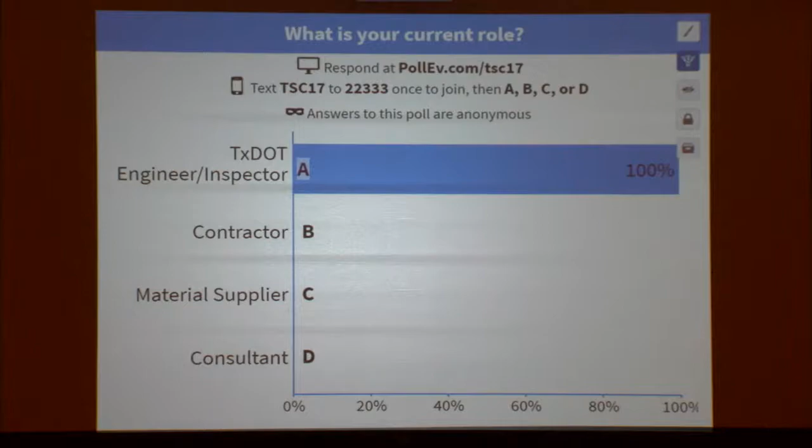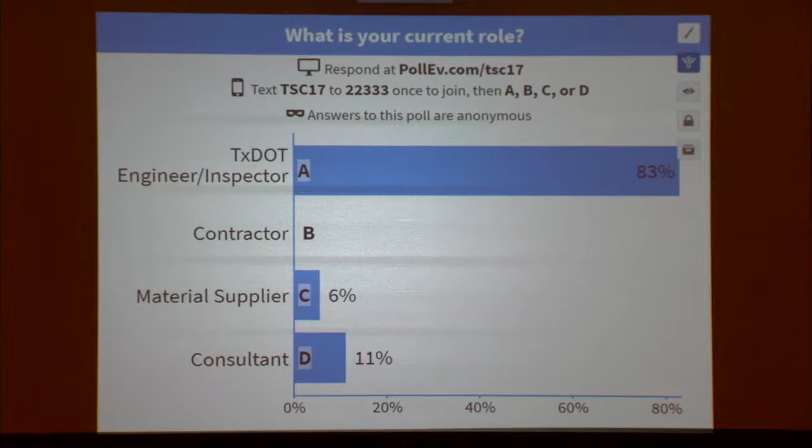All right, so first poll question, what is your current role? I think we had a similar question, so we could probably see that most of us are going to be TxDOT. I guess all the industry left. There we go, a few material suppliers, consultants. So just to give me a sense of what the room is here.

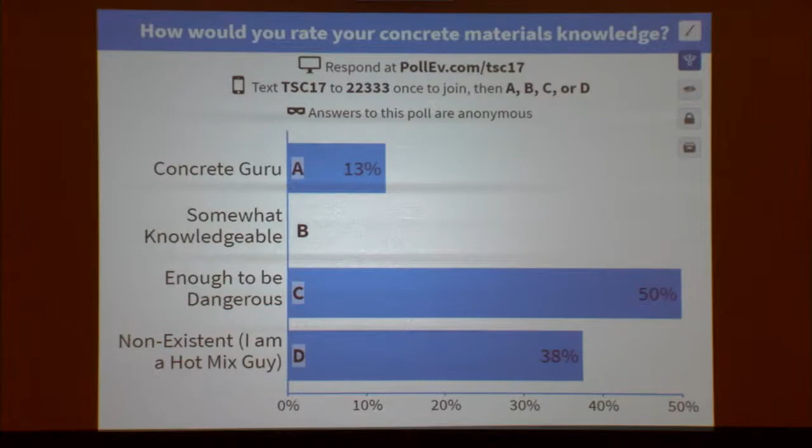All right, next question. How would you rate your concrete materials knowledge? Do you consider yourself a guru, somewhat, enough to be dangerous, or non-existent because you're a hot mix guy? All right, I get to teach some hot mix guys some things. All right, you concrete gurus, you're going to want to answer all the questions - so if you answer you're a guru, be warned.

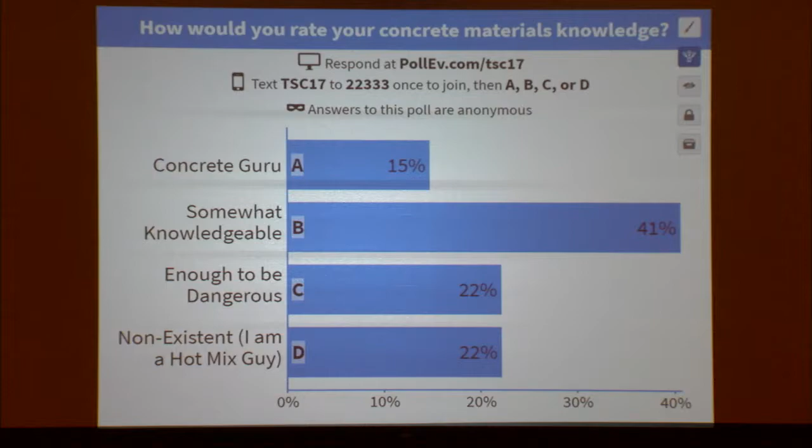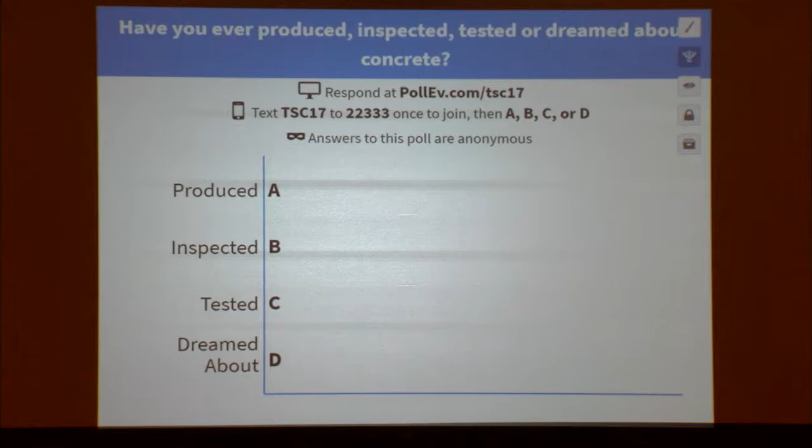All right, next one. Have you ever produced, inspected, tested, or even dreamed about concrete? Hey, I was afraid I was the only one. Man, I'm glad. All right, there's a bunch of sick minds in this room, I guess - 20% of us dream about concrete. Awesome, all right.

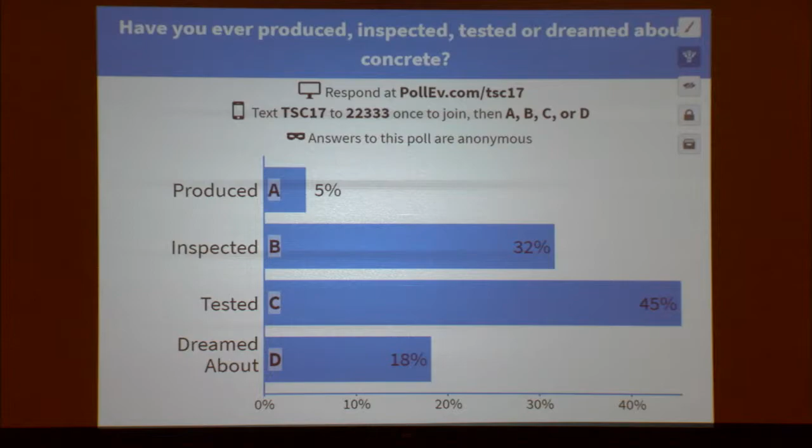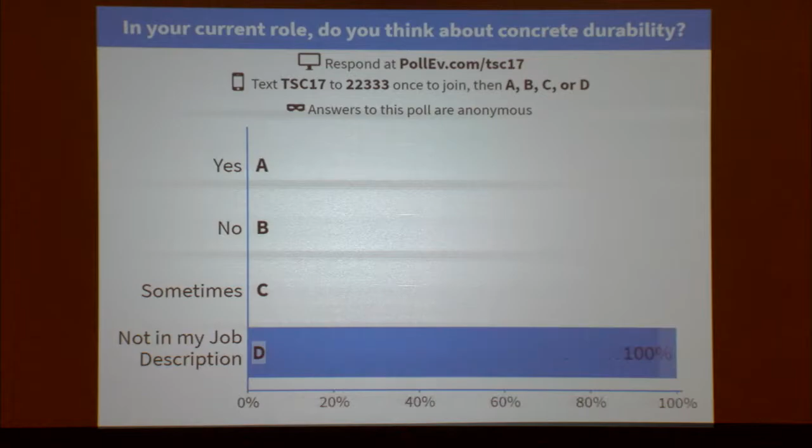In your current role, do you think about concrete durability? Well, that's good, a pretty good percent of us think about durability during our jobs. I would not have expected that, so I'm actually glad to see that percentage is pretty high.

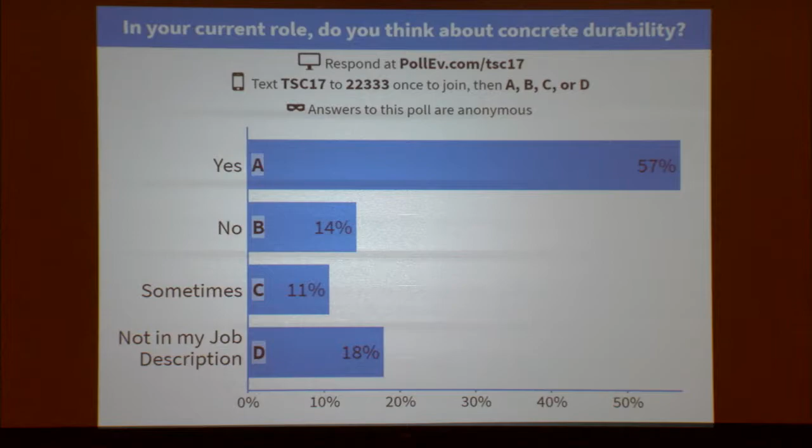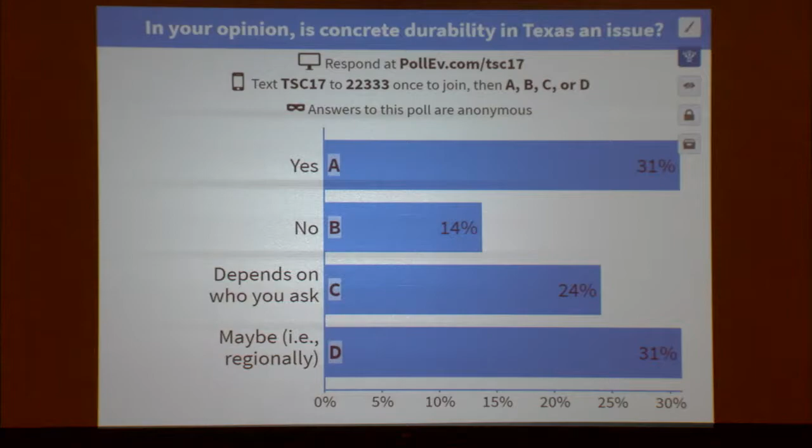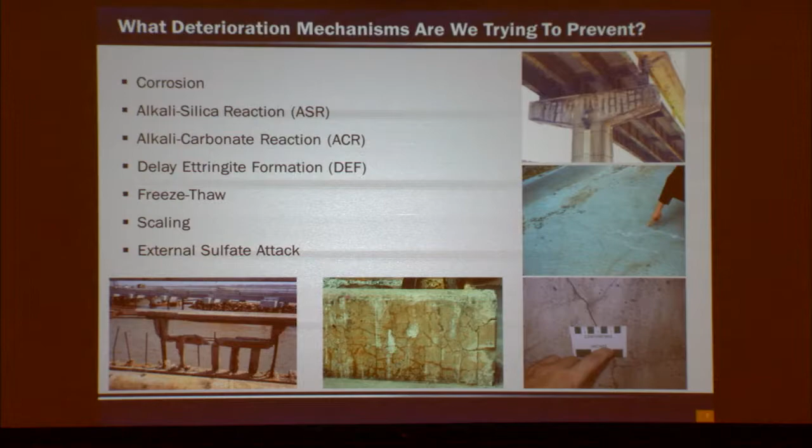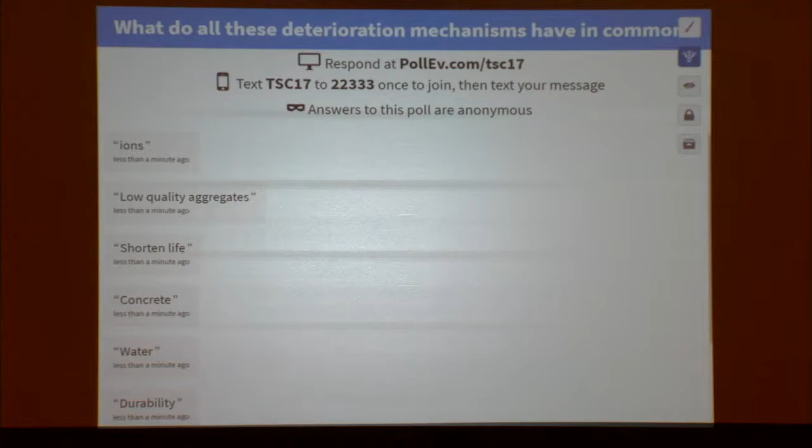So next question is, what do all these deterioration mechanisms have in common? Take a best guess - what is the one thing they have in common? Don't be shy, you're not getting graded. Failure, okay - guess that's the topic of the presentation, huh? All right, those all have their common things. Well, who said water? Raise your hand, who said water? We're back there - that is actually the right answer.

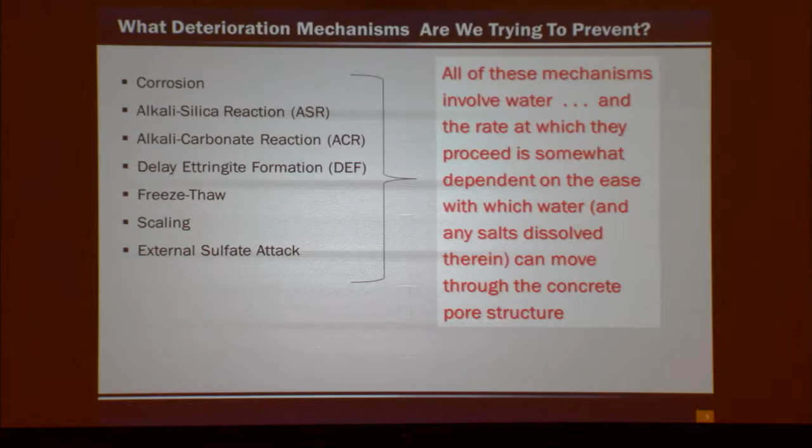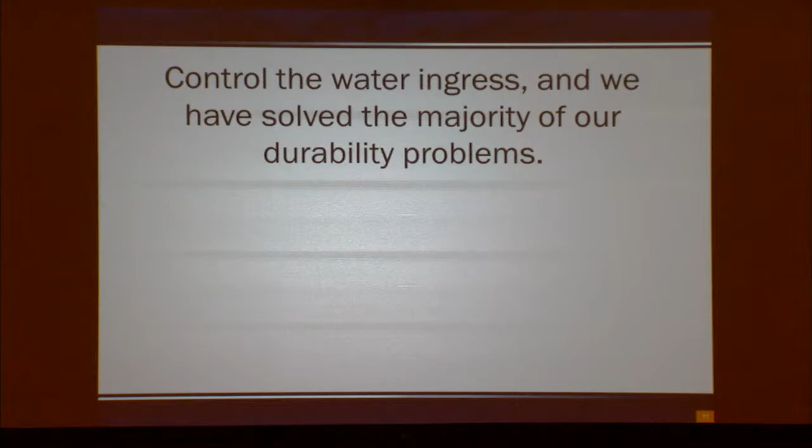Water is the one thing that all these have in common. We're trying to control water, and if you stop that, you probably get rid of most of these deterioration mechanisms. So I'll let you in on a little secret, okay? We control water ingress, we control these durability mechanisms. All right, so easier said than done, especially in transportation structures. Most of them are in water, some are in water, it rains, right? So it's kind of hard to do. So how do we do that? Well, we have to look at, with most things, the entire approach.

We have to look at the environment where our structure is going, any design aspects we have to consider. Do designers even consider durability as they're going through this process? Then we get into materials, proportioning, curing, all with the goal of minimizing cracking. You stop cracking, you're already ahead of the game. But if we have decks that crack, we're setting ourselves up for failure.

This is a topic I could talk about all day, probably three days, a month, so I don't have enough time. I'm only going to focus on a few of these yellow boxes here to give you an idea of what we do as far as durability.

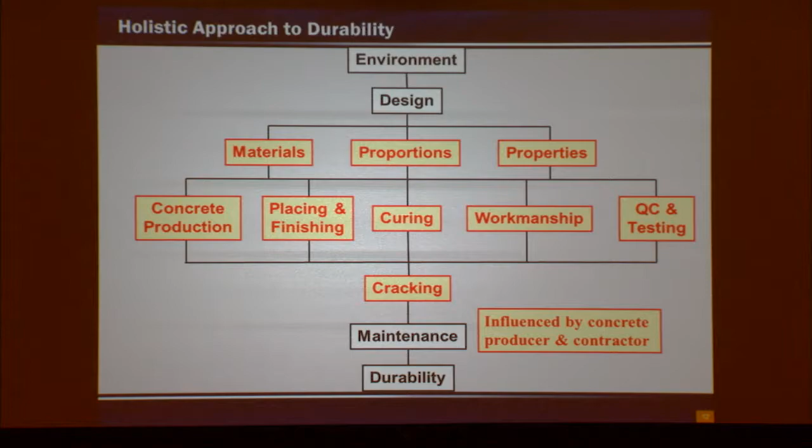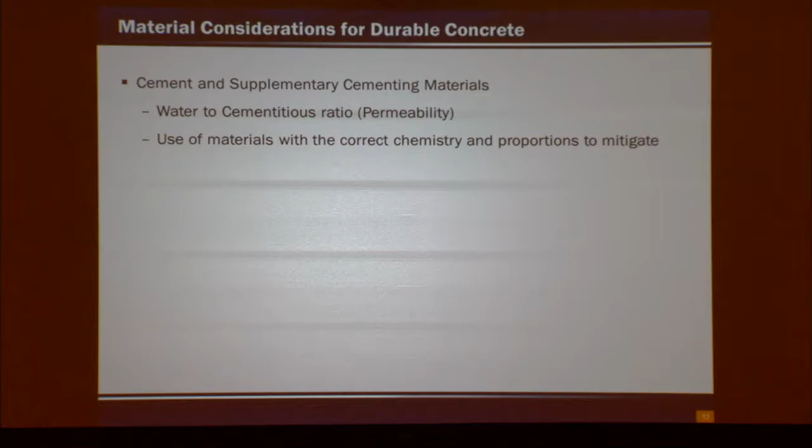So a few material considerations for durable concrete. The first issue we'll talk about is cement and SCMs. Everyone knows what water-cement ratio is, right? It's our weight of water per our weight of cement, that's our main parameter, and it tells us some degree of strength and durability. That's one topic I'll discuss, and then other things like chemistry of materials and proportioning.

You are warned, there is going to be some chemistry involved in this presentation, and you will be required to remember at least one of them. You will be tested at the end, so keep that in mind.

So water-cement ratio, and in the terms of this presentation, I'm talking about permeability. We've got a few concrete guys in here — who has ever measured permeability, and I'm not talking the rapid methods? Who has ever done that? I just said the most important thing is keeping water out, and no one here has ever measured permeability.

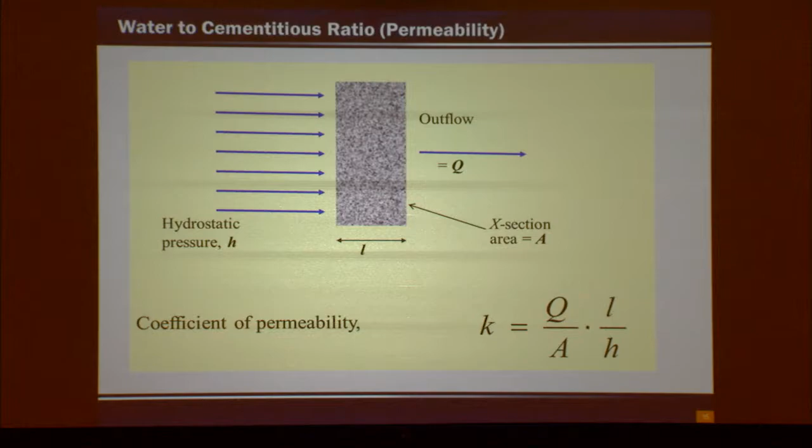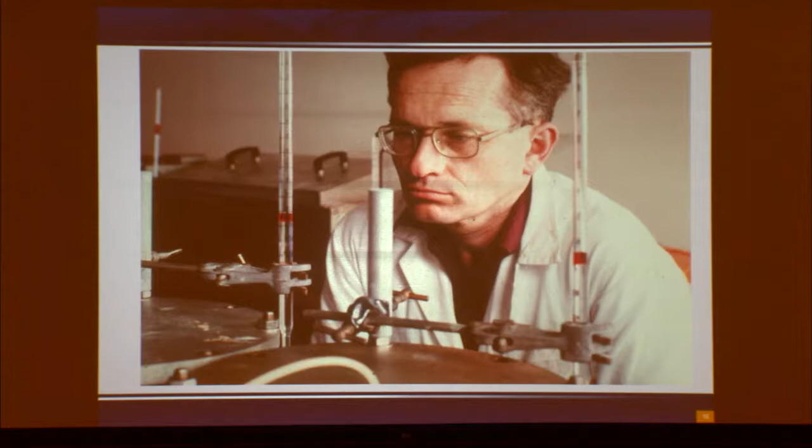So why? This is what permeability is — the flow of water through concrete, and we're trying to minimize that. So why don't we do that? We don't want to end up like this guy, right? This probably has to be the most boring job ever, watching that little tube and how much water is flowing into that concrete. But it's a very important parameter of concrete, and if we stop the water ingress, we will stop most of our deterioration mechanisms. But I can't imagine doing that all day.

In terms of permeability, what we're looking at — this is a high water-cement ratio concrete, a little depiction here. Cement particles in some water: the higher the water-cement ratio, the further the particles are from each other, basically diluting the system. But we're also creating these larger pores that are connected to each other now, and that's the path for water to come in when it dries.

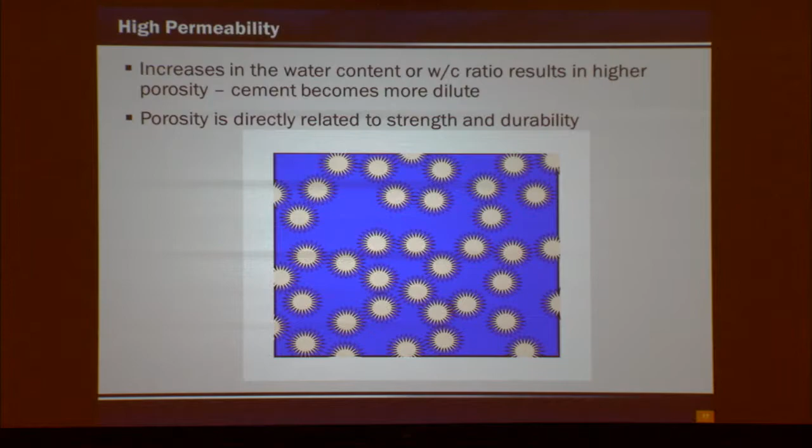When we talk about lower water-cement ratio mixes, our cement particles are closer together, we have less connectivity of the pores, and therefore the ability for water or other ions to get in is reduced. That's the goal in terms of trying to set a lower water-cement ratio — it's really for a permeability issue.

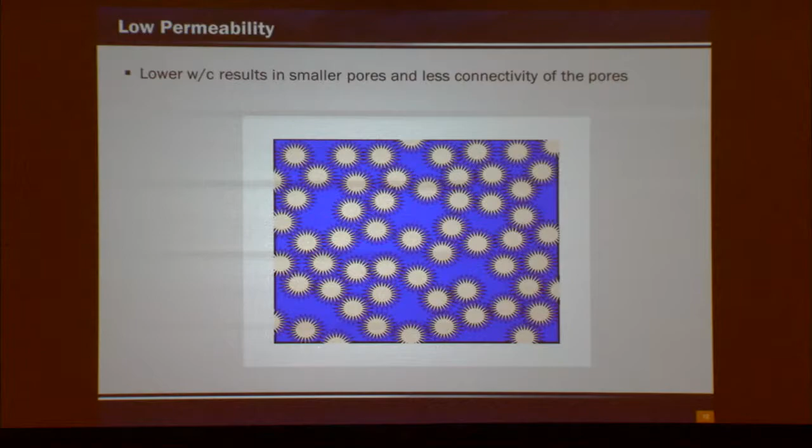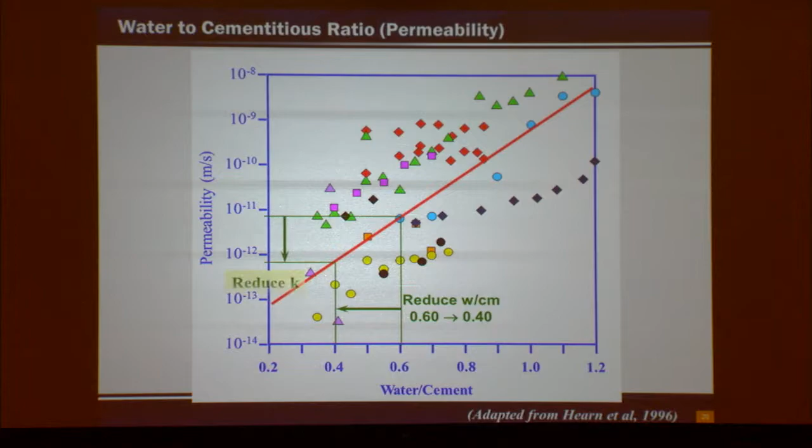Here's some data showing water-cement ratio versus permeability. Again, there is some large spread, meaning there are other factors that control permeability. However, water-cement ratio is a fairly large lever arm in terms of permeability — we could get some substantial reductions in permeability if we reduce the water-cement ratio slightly.

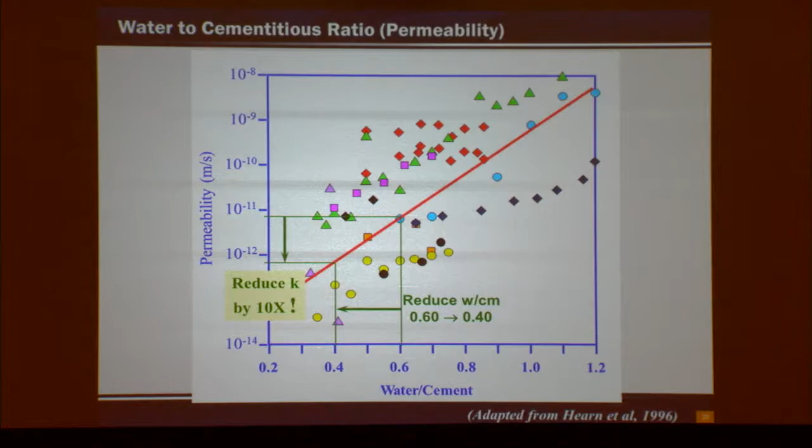What's our specification for max water-cement ratio for most concrete? We're at about a 0.45 limit, so we're somewhere around here. We've lowered that limit over the years to try to get less permeable concrete out there in our structures. We also get a strength increase with the lower water-cement ratio as well — that necessarily isn't always a good thing, but it does come along for the ride.

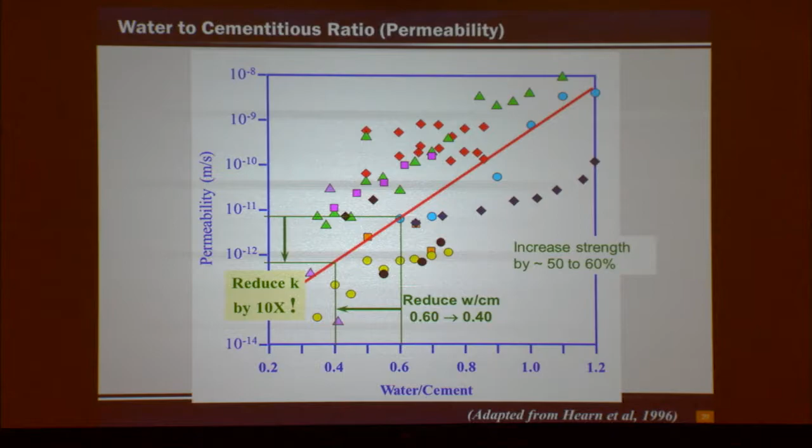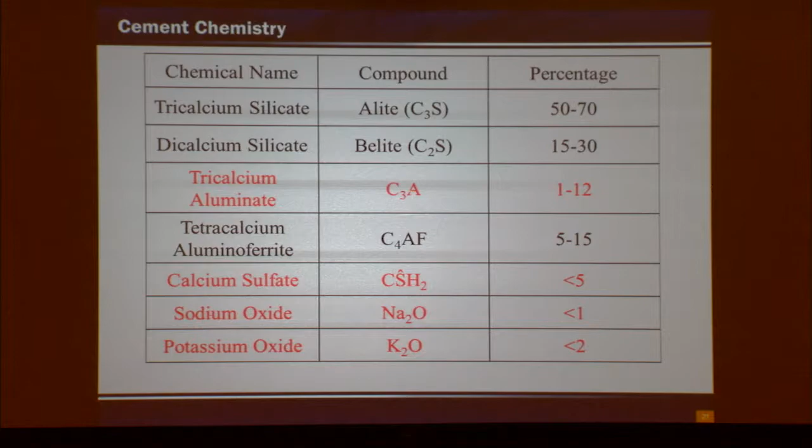So as with everything, we need to have a goal though, right? Our goal for concrete hydration is to produce as much CSH as we can, reduce calcium hydroxide, and reduce porosity.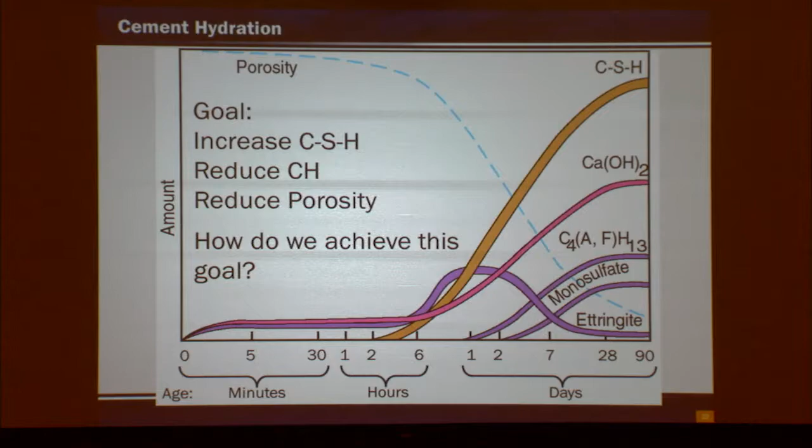So how do we do this? What do we do to achieve this goal? So here's your next question. Any guesses? What one thing can we do to solve or get all three of those goals achieved? This is a tough one too, so we'll see how good you guys are. There's at least one person in here that should answer it right. No pressure though. Beat the hell out of Florida, okay? Wasn't expecting that one. Wait.

All right, so how does fly ash do this? Well, let's look at the reaction, right? So when you mix cement and water, those are the strength guys, add some water, you get glue, and you also get calcium hydroxide. So what was their goal? Increase this guy, decrease that guy. So when I put fly ash in there, fly ash is basically this silica and aluminate content. They're going to grab this CH, use it in its reaction, and now I've made more glue, and I've reduced the CH. So I have achieved two of my goals already, right? By putting fly ash in there, I got two goals achieved. Now I got to work on the porosity. So where does the porosity thing come into play?

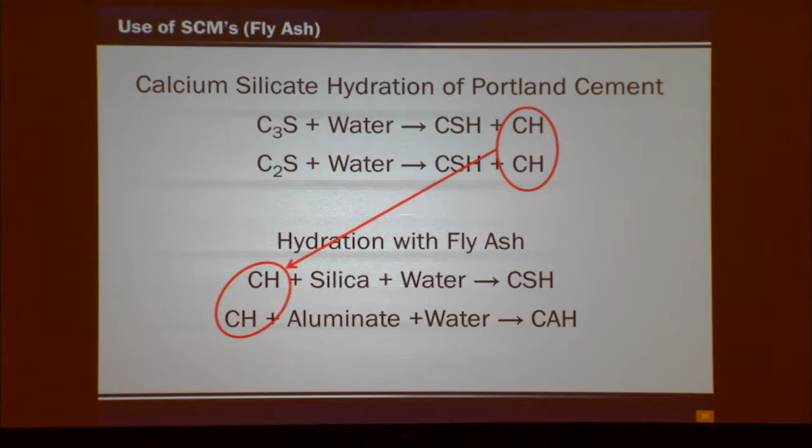All right, so let's look what happens when you use fly ash. Okay, so again, we use up that calcium hydroxide, and then we have this phenomenon of improving this transition zone, right? So if you look at an aggregate, that calcium hydroxide that is produced, it's plates. I don't know if you saw some of those presentations early on show those micrographs. So calcium hydroxide are these plates, these flat plates, and they line up along the aggregate. So this zone right here is very porous. So water comes in and it's going to find those zones and just trickle its way down through the concrete. So again, when we use fly ash, we use up this calcium hydroxide and we make more glue. So there we go, we have now improved the porosity of that region, and now that is more like the bulk paste out in the middle.

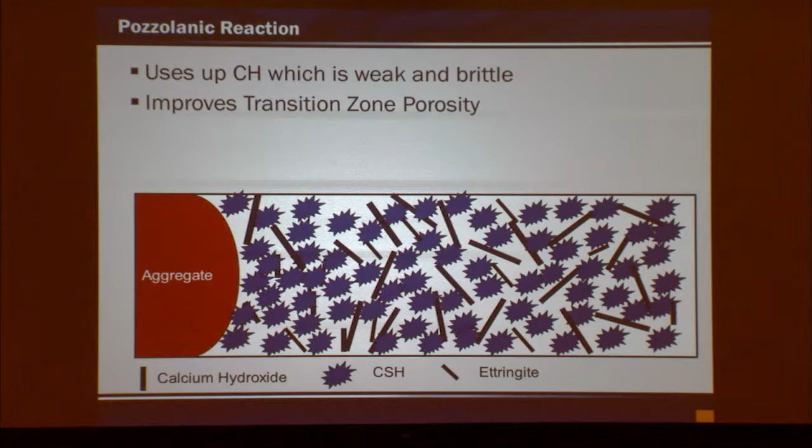So fly ash is very, very beneficial to concrete. Here's some data showing just that we have a substantial reduction in permeability over time when you have fly ash in the mix.

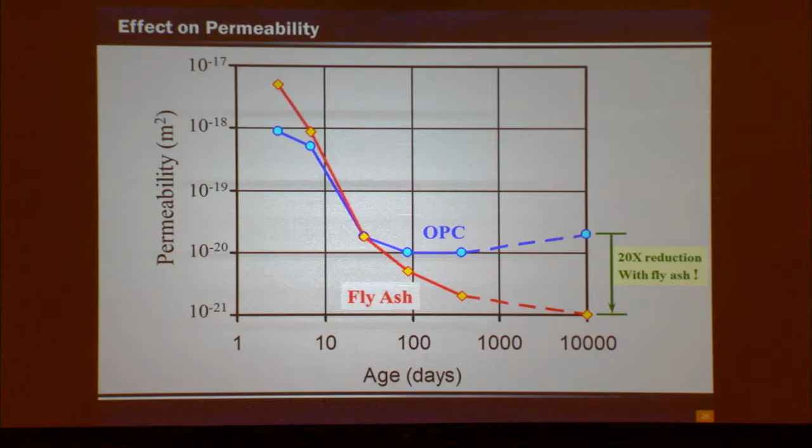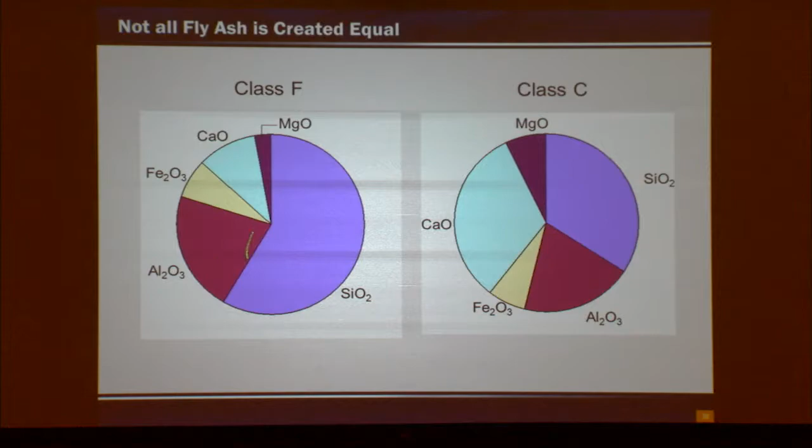All right, not all fly ash is created equal. This is Class F fly ash, it is basically a silica based material, right? That's what we want. Class C fly ash is kind of more of a calcium oxide with some silica. It also has the glass chemistry is also different between the two. This has more calcium aluminate glass, that C3A glass that I said was a bad player early on. This one doesn't, this is more of a silica aluminate glass, right? So this is good for most durability aspects. This maybe not so well.

Let's put 20% C ash. Man, that failed. More should be better, so here's 40%. That didn't get better, because the chemistry of the glass of the C ash is completely different than the chemistry of the glass of the F ash.

And if you read our specification, we say no C ash in sulfate environments. So why do we do that? This phenomenon right here, because the chemistry of the fly ash is not set up to control that durability mechanism.

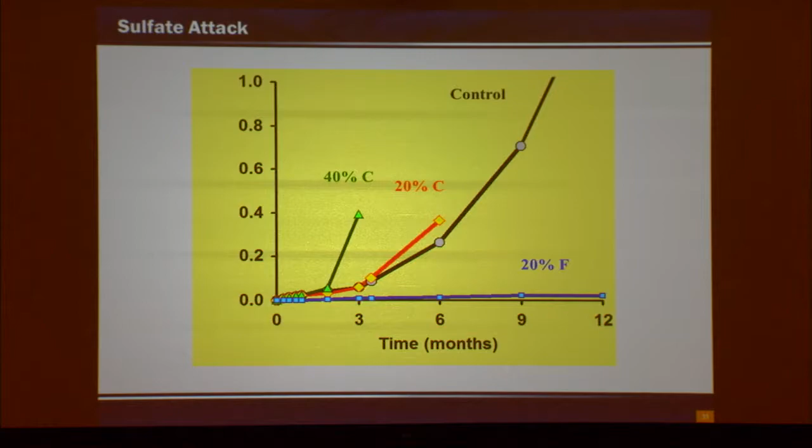Here's some research we did, actually some of my research from when I was in grad school. This was probably a month into the test, and it completely disintegrated. This had a high calcium C ash in the mix. The F ashes went 18 months. Here's some exposure blocks or prisms that were in a tank, and they completely disintegrated. So we have evidence that this is a true phenomenon, right? C ashes don't behave well in sulfate environments.

So just keep that in mind when producers come to you and say, 'Hey, I want to switch my F ash to my C ash.' Slow down there, right? We need to figure out what we're doing before we allow that requirement.

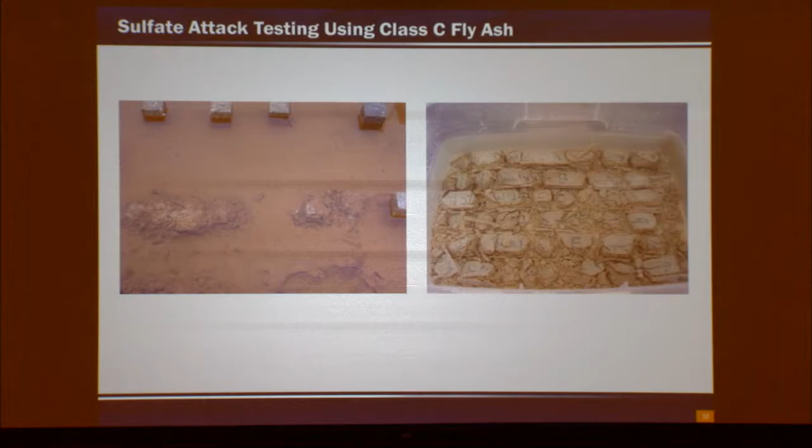I talked about the delayed ettringite formation earlier on. It's a lesser of the mechanisms that we have in Texas, but we still have it. It's a cement chemistry issue, but more of an early age temperature history issue. If we let things get hot too early, we don't allow the right products to form, and we'll have issues down the road. Basically, if we get this concrete temperature up above 160 degrees, our sulfates and our aluminates get trapped in the hydration products, and they're not available to do what they normally do.

Okay, no big deal, it didn't happen the way we wanted it to happen. Is that a problem? Well, in 10 years, it may be. Because as water comes into our concrete, because it's high permeability or whatever, these sulfates and aluminates get back into solution. They go into the pore solution, but they don't like being alone, so they have to find each other, and they make ettringite. Ettringite is a crystal that loves to grow big, and as this crystal grows and grows and grows, it exerts pressure. Concrete's not good in tension, and therefore we get cracking and substantial cracking.

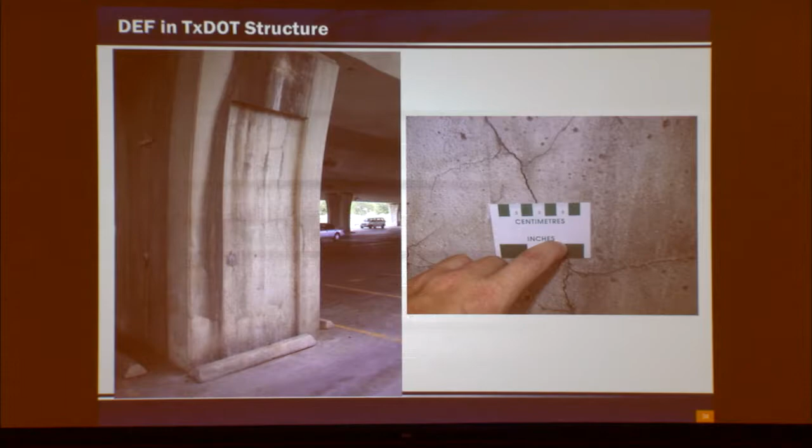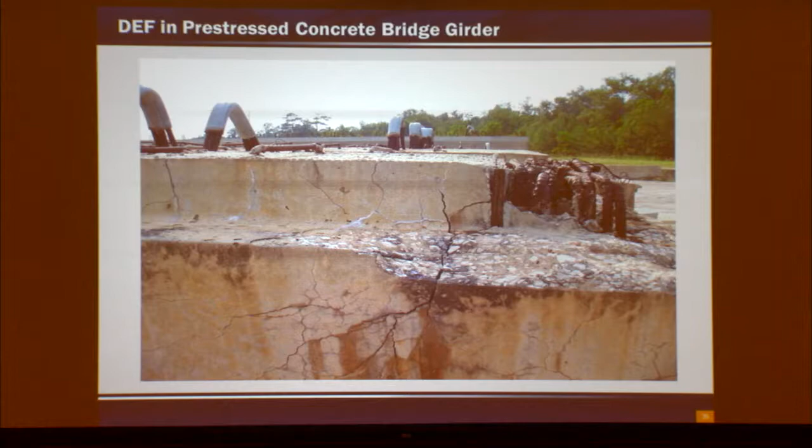Also in precast, it's been an issue because of high cement contents, trying to get early age strength. This is a girder that would have gone to Houston, and you see all the cracking that developed. That girder just sat there, it's never been in service. So we have had these issues in Texas.

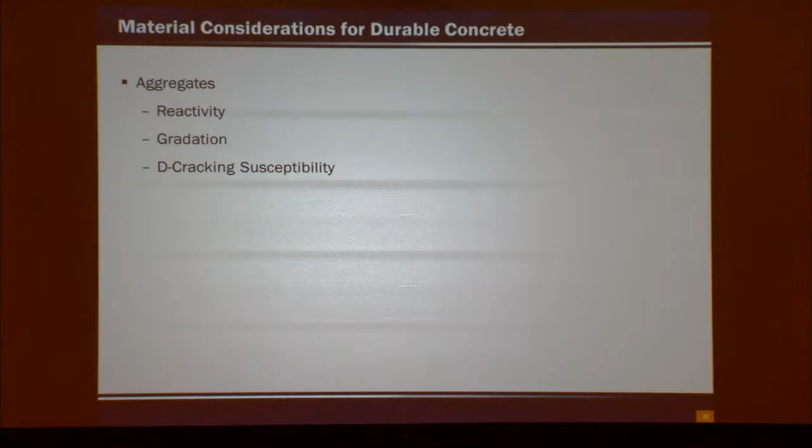All right, so let's switch our role to aggregates. Anyone's ever heard of D-cracking? We don't have any in Texas that I'm aware of, which is a good thing. Other DOTs fight this every day. So we're fortunate that we don't have D-cracking, so I'm not really going to cover D-cracking.

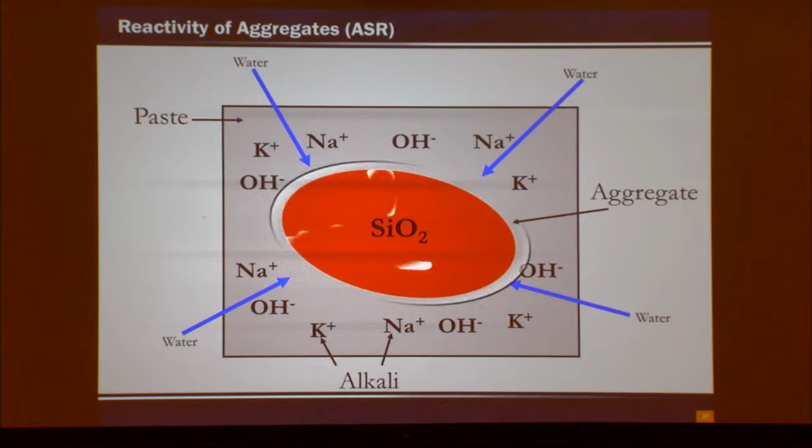All right, let's talk about ASR. As someone mentioned earlier, it's an alkali-silica reaction between the silica in the aggregate—that's an amorphous silica—and the alkali floating around in the paste. You have these hydroxyl ions that make everything high pH. Those will dissolve the silica in the aggregate, that silica comes out into solution, reacts with the sodium potassium, and when water enters the system, makes this alkali silica gel.

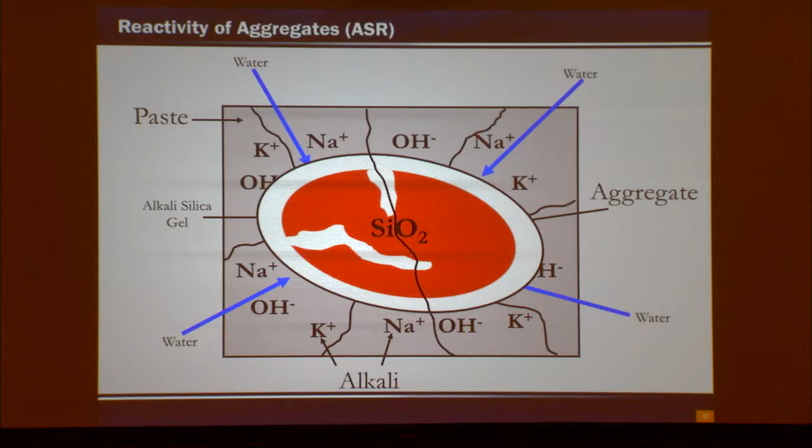Here's a prestressed girder. It's okay, no blackberries were harmed in the making of this photo. But if you're ever wondering what happened to all our blackberries, we fill cracks with them.

So that's what we do. They didn't go to waste. But this is a girder in central Texas, around Austin, that is still in service, that has a pretty substantial crack in it. A lot of research was done on ASR deterioration, and this girder, even this severely cracked, still has enough capacity to carry load. But now you start getting into corrosion issues, and how long is that going to last?

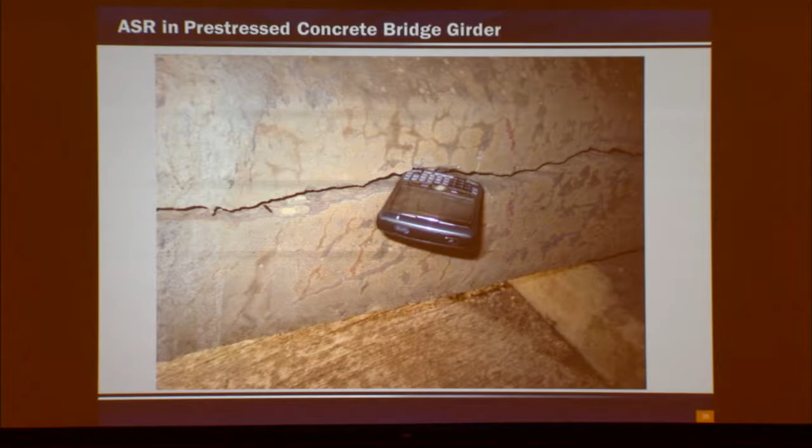And TxDOT made a very good decision back in late 90s, early 2000s to say all aggregates are reactive, so everyone's guilty of being reactive, and you cannot prove your innocence. So I call it Texas law. You're guilty and you can't prove your innocence.

Some of our specifications limit alkalis. That's a good one. But again, use of fly ash and other SCM combinations. And so if you look at our specification, we have 8 mix design options. All those mix design options are there to mitigate ASR. They're there for no other reason other than to mitigate ASR. So if you have a contractor saying, no, I don't want to use one of those options, you're running a risk that you're going to have ASR in your concrete down the road.

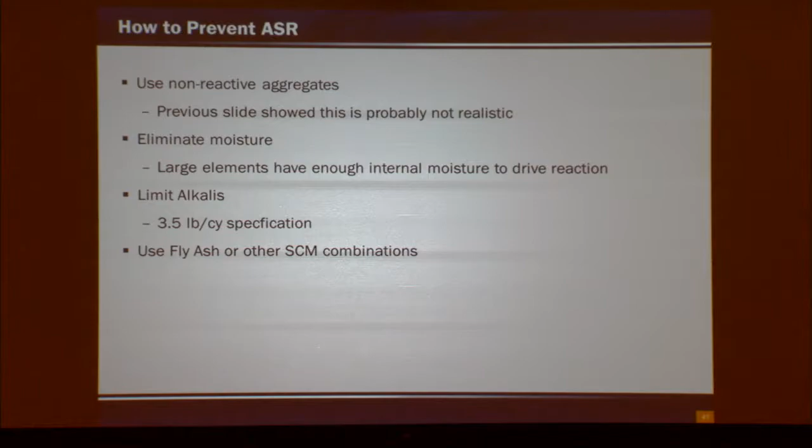So just keep that in mind when they come up to you and say, hey, I don't have fly ash, can I put 800 pounds of cement in there? Like, no, that's not what we want. You have to have the right amount of ash. Again, this is our F ashes, and hey, 20%, what's our minimum? 20%. So I mean, we just didn't pick that out of the air. We actually have some data showing that's where we need to be for ASR mitigation for most of our aggregates in Texas.

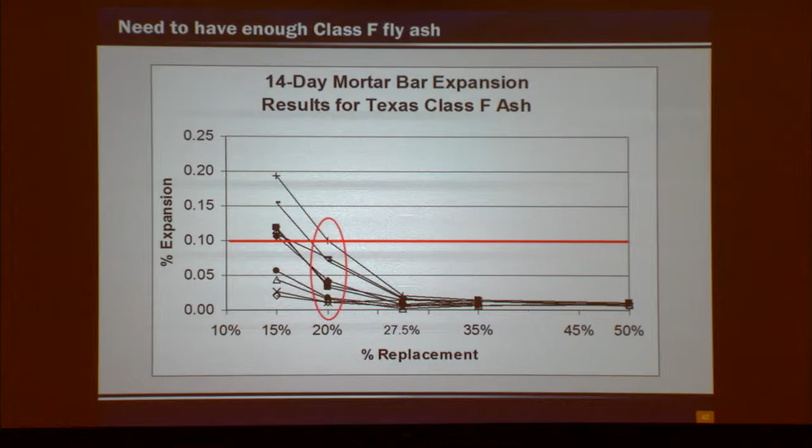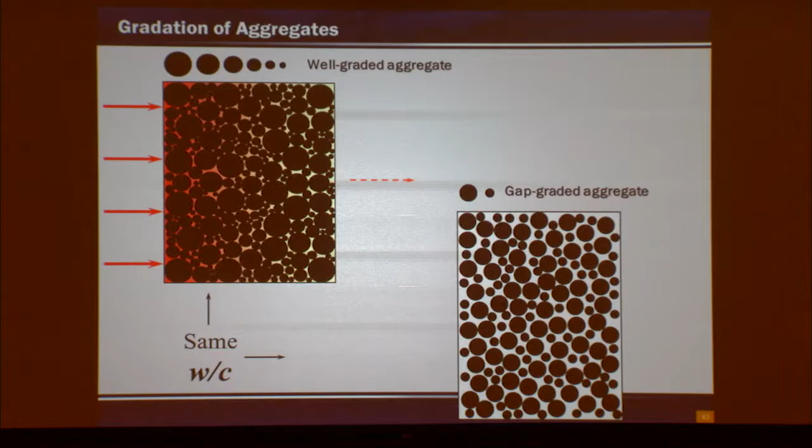Gradation is important. I am a well-graded guy. I love optimized graded aggregate. I think it does wonders for reduced paste content, reduces shrinkage, reduces cracking, so all that helps. Versus gap graded, have a lot more paste to fill those voids. Permeability gets reduced because of the lack of paste. So, I mean, there's other benefits to having well-graded aggregates as well.

Internal curing is a kind of a hot topic here nationally. I'm pushing to have, me and Bridge are pushing to have more of these things used. But basically what internal curing is, you're actually using lightweight aggregate that has a lot of porosity. You saturate them, and then - who's ever looked at concrete as it dries, right? That sheen of water, and then they say once the sheen of water disappears, that's when you spray your curing compound and things like that.

Well, why does that water disappear? And most people think it evaporates, but no, that's the point in time where the concrete goes, hey, I want water, and it starts to suck it up, right? That is what's happening. Those capillary pores are now restricting, and they're going to pull that water from the surface because it wants water. Well, when that happens, that's when these aggregates come into play, and they say, hey, I got all this free water. I'm just going to give it to you now. And so when that concrete sucks up that water, now it has a source to suck it from. And so that's what happens with internal curing.

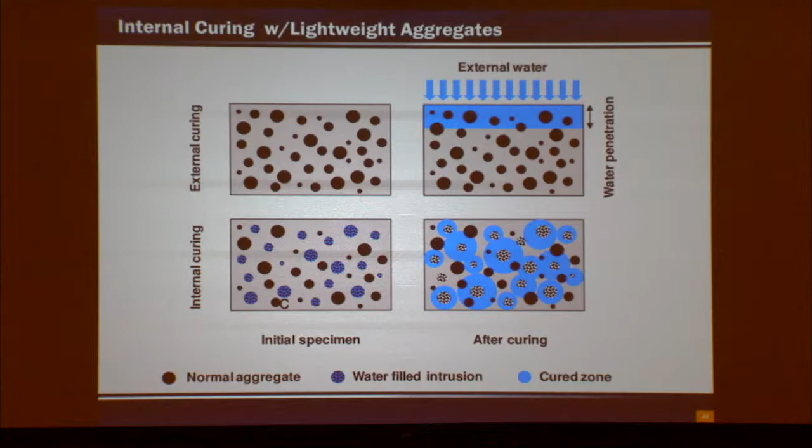Rather than trying to provide moisture from the surface, we're providing moisture through the entire bulk of the concrete. So I think this is going to be a huge step forward in improving our durability, especially in harsh environmental conditions, high wind, low water, low humidity, things like that.

Again, there's a lot of data out there on internal curing. People have researched this stuff to death, so I don't think we need to research it anymore, we just need to implement. So a lot of stuff showing the benefits, less shrinkage and all types of things that were used with internal curing. So I really want to try to push this idea forward in the department.

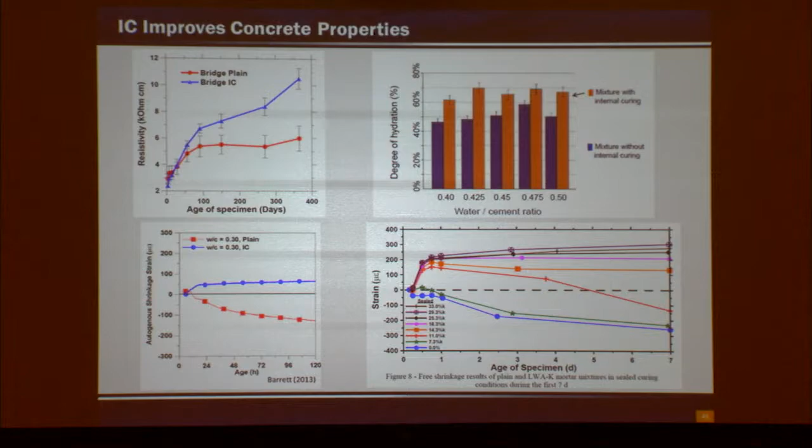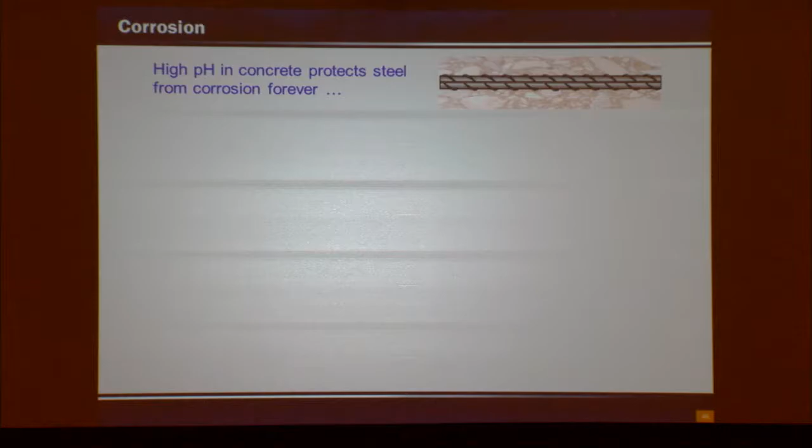All right, now the big one, corrosion. Again, steel loves reinforced concrete, or steel loves concrete, because of the high pH environment. We're about 12, 13 pH. However, if we start adding salts, or salts get down to the steel, we will start to corrode. Or if carbonation occurs in our concrete, we will also get some carbonation corrosion occurring as well.

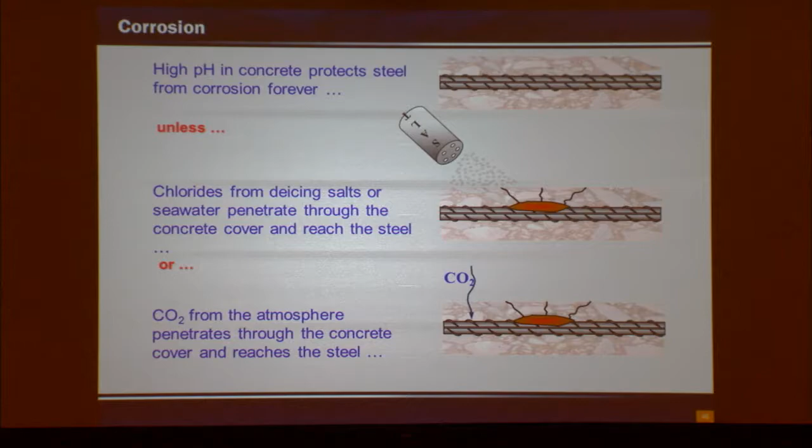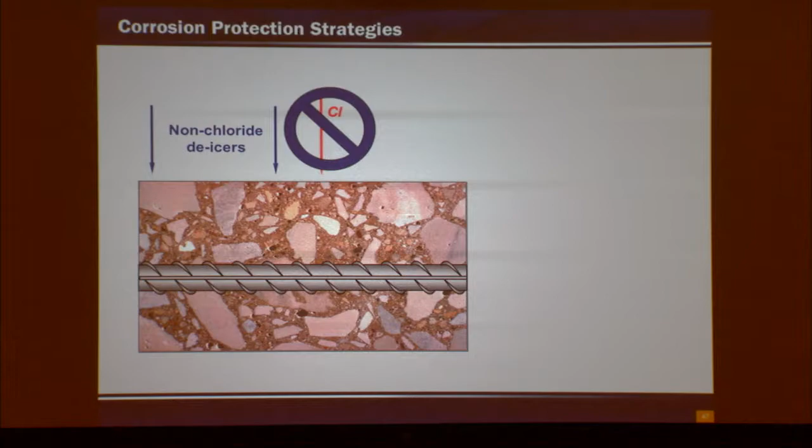All right, so a couple of the protection strategies. Don't use chloride de-icers. Well, our policy right now is to use brines, and so I really worry that we're setting ourselves up for a huge issue because we're going to be putting these brines on our decks, especially our older decks that were built 30, 40 years ago, that we weren't thinking about long-term durability back then. We weren't using fly ash, we weren't thinking about all this stuff, and so now are we going to have issues, right? So that's going to be, time will tell what happens there.

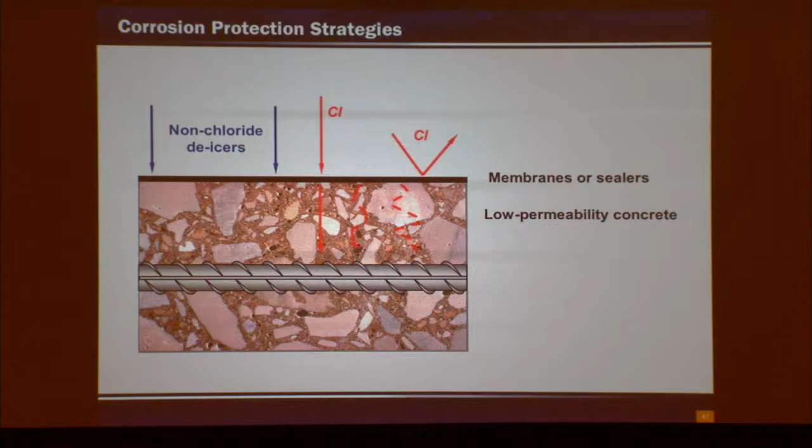We use membranes to seal them. However, those become issues with skid and how well do those membranes last, things like that. Those tend to keep chlorides out. Again, most of our spec is trying to focus on low permeability, fly ashes and lower water-cement ratios, things like that. So that's kind of where we have driven our specification.

Epoxy coating, steel, stuff like that, we use those in several districts. Non-corrosive materials, FRP bars, stainless steel, some of those things, we've used those from time to time. Chemical corrosion inhibitors - some of our bigger structures, marine structures, have gone that route, adding 2 or 3 gallons of CNI in the concrete. That also buys you some time for corrosion. So there's a couple different things that we could do for mitigating corrosion.

But again, the first step is getting non-cracked concrete, right? For low permeability, non-cracked concrete is probably the easiest thing to do, and that's kind of what our specification tries to focus on.

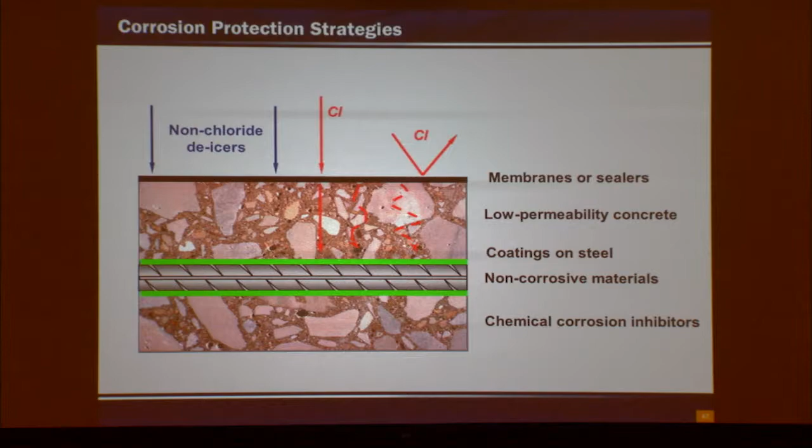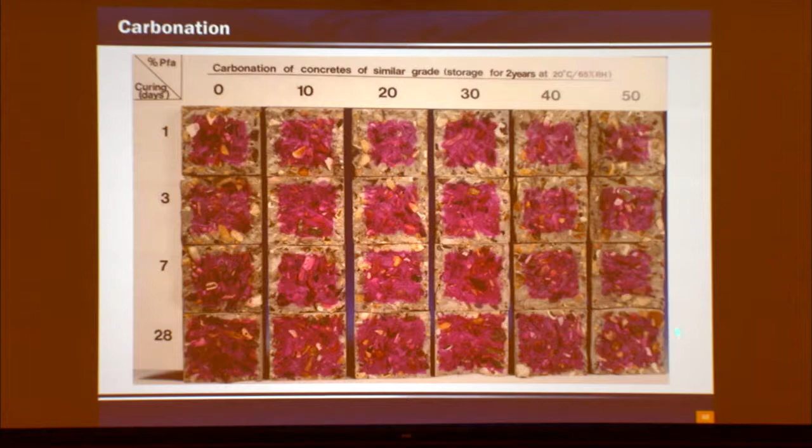So we're doing something good, but we're kind of doing something bad for carbonation. But the saving grace is, well, if I cure, then I have less carbonation. Look at the difference between 28 days of curing versus that. So the main takeaway here is cure your concrete, but cure it properly.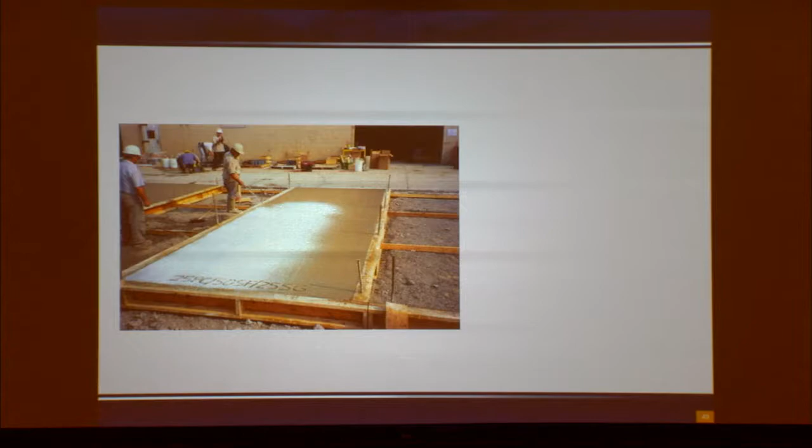We want this nice, even, white coating of curing compound. The best specification I ever read for curing was from Minnesota, and it said the curing compound shall be as white as a blank sheet of white typing paper. It had nothing about rates, had nothing about number of coats. It was just make the damn thing white, okay?

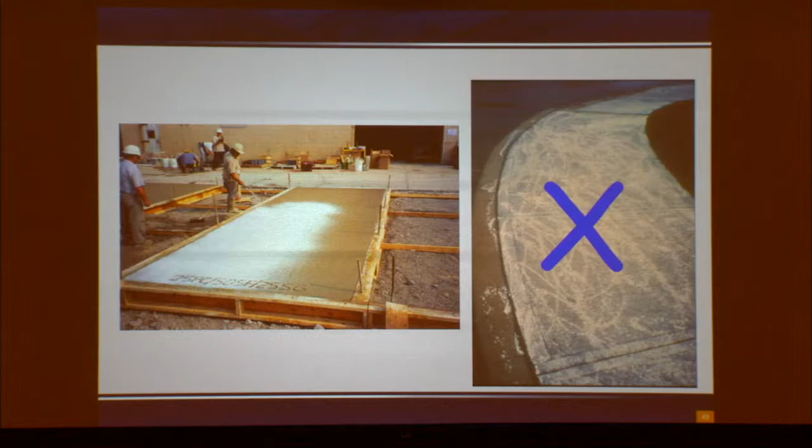What we don't want is this. Who's seen this? All right, I was on a project last week and they were pouring sidewalk, and this is what we saw. They have done nothing here for curing, right? So if you see this on your project, that is not acceptable. Because they're doing it with sidewalk, they're doing it with riprap, they're doing it with rail, they're doing it with paving, they're doing it with everything. So this is not acceptable. So I'll get off my little soapbox right now, but we want this, we don't want that.

All right, freeze-thaw. This is kind of the classic image that everyone shows for freeze-thaw durability, and kind of the deterioration that happens.

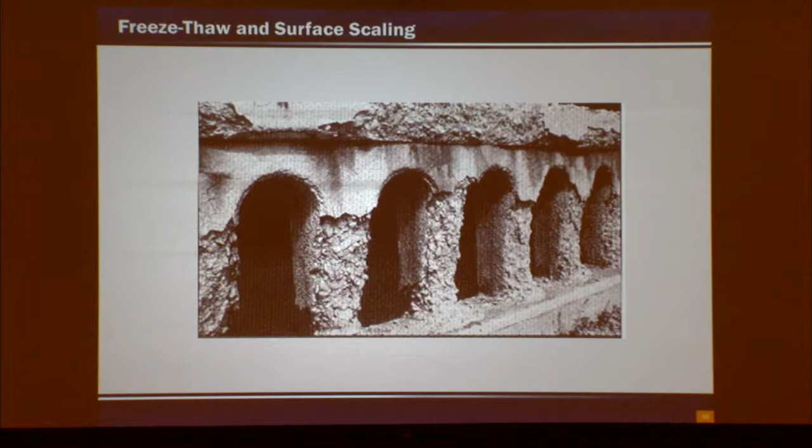Where are my beer drinkers?

Oh, come on, I was out last night. There's more of you in here than that. That's right. What happened here?

You fell asleep, and your wife woke you up in the morning screaming, 'What did you do to my freezer?' You left your beer in the freezer, and it busted, right? Well, the same thing that happened with your beer bottle will happen in concrete.

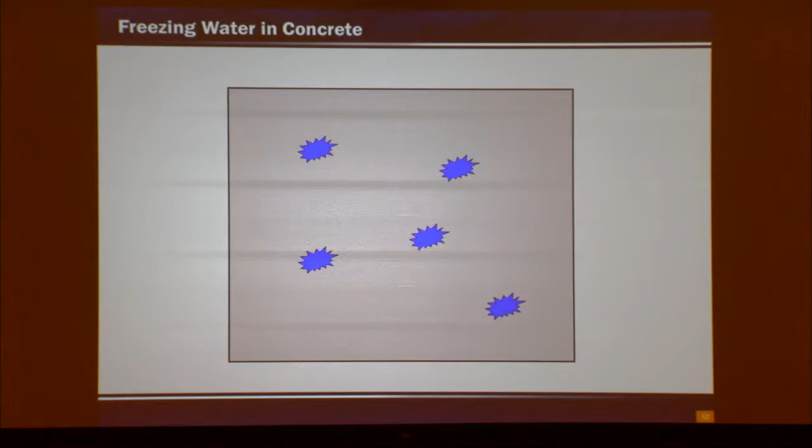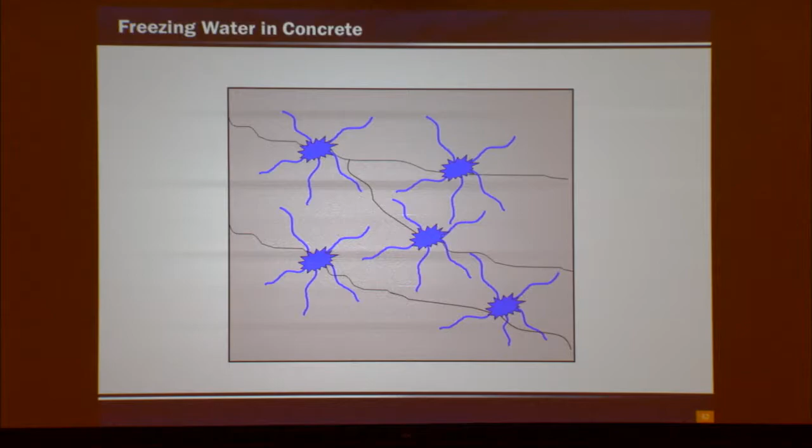As the concrete gets saturated, it freezes. Water has to go somewhere, so it tries to go through all the little pores, creating pressure. That pressure ultimately cracks the concrete. That's basically what happens with freeze-thaw damage. It happens at layers—the first layer starts cracking, and then you just go lower and lower. So how do we resist freeze-thaw damage?

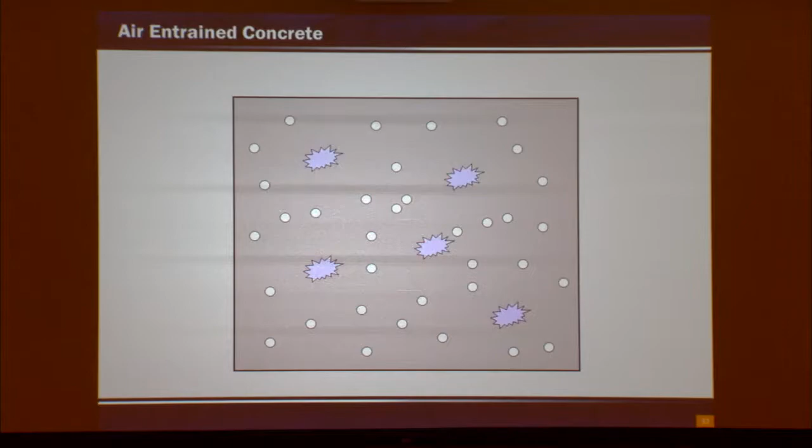We use air entrainment. We purposely put very small bubbles in the concrete, so that when the water freezes and has to go somewhere, it has a place to go. It will fill up these voids and not create the pressure we would normally get without air entrainment. Pretty simple. The problem is getting the bubbles at the right spacing, and I can tell you air content isn't always the best way to measure freeze-thaw durability.

Because you can have coarse air, 5%, but your spacing factor is way off. So people are working on trying to measure spacing factors in fresh concrete, and I think they're close. I think we're doing it now. So that's something we'll probably look at implementing in the future.

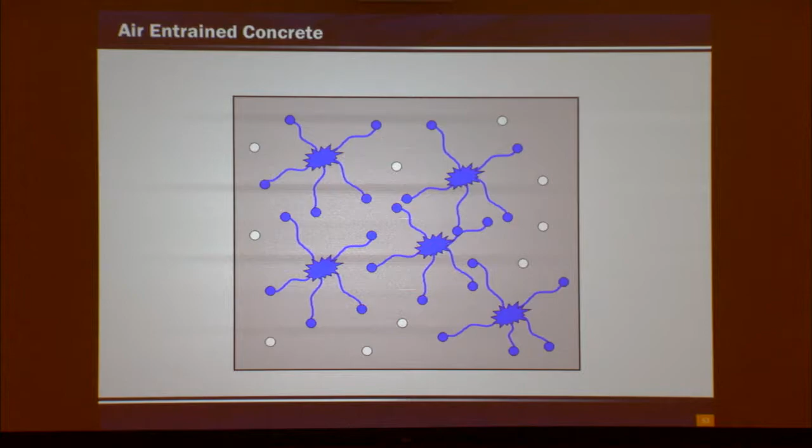The big question I always get is, do I need air? I'm in Fort Worth—do I really need to put air in my concrete? That's a question we've been getting for years and years. And the guidance we've been giving is: anything north of I-20, use air; anything south of I-20, don't use air.

And I always find it odd that these guys always use air. I'm like, well, why are you using air? They're selling you air—why are you using air? It can cause problems, but they've been doing it that way for 30 years, so they like using air.

But we don't have very many freeze-thaw cycles, and the important thing about freeze-thaw cycles is they need to be wet freeze-thaw cycles. We need moisture to drive the freeze-thaw deterioration. So we don't have very many, but we do have some.

So the question becomes, when you get into fly ash—I want fly ash in my concrete, but there's an issue: the unburnt carbon in the fly ash consumes the air entraining admixture. So you're moving along fine, then you get a bad load of fly ash, and it kills your air.

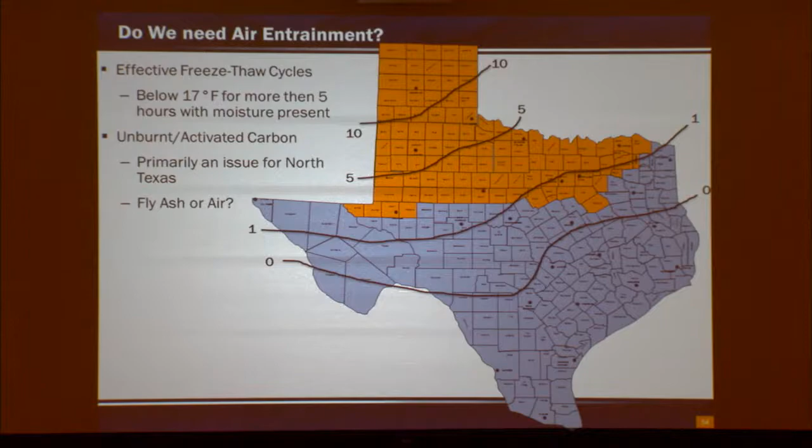So then you start dumping more air entrainer in there to get your air back up. Well, your next load of fly ash is good, and boom, you've got 10% air, and your strength tanks. So we're always chasing this air content issue.

So you northern districts really have to figure out: do I want fly ash, do I want air? The fly ash industry is working hard to try to treat ashes so they don't have this air issue. But the problem is going to be when power plants start using activated carbon for mercury emissions.

This stuff is so porous that it will consume all your air entrainer. My hope is that they'll only have to use a very small amount, and then things become consistent—we won't have these fluctuations of unburned carbon. We'll know exactly the level of air entrainment we'd need. So we'll see, time will tell. They're still kind of working on these emission requirements. In the next couple of years, we'll really see more activated carbon in all our fly ash.

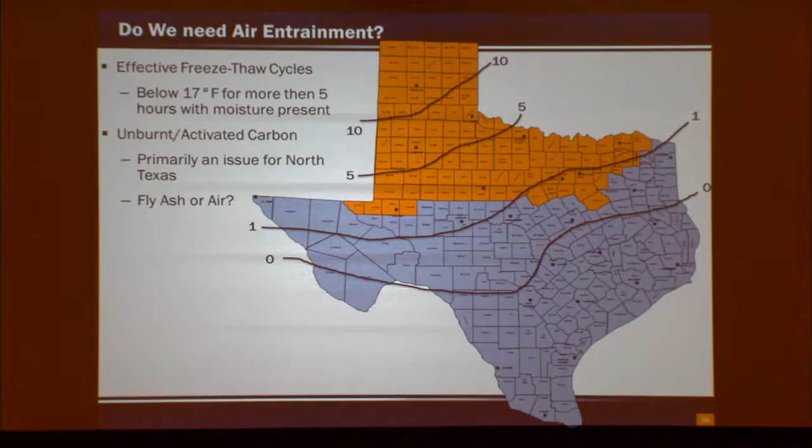All right, so that's all I had. My wife's a teacher, and we always sit down at dinner table, and she asks the kids, what's the one new thing you learned today? That's the question we always try to tell our kids—we want you to learn at least one thing a day. So here's your chance. It doesn't have to be with this presentation. If you learned anything over the course of the day or even the conference, feel free to write it up there. I just want to see if we imparted any knowledge on you guys today.